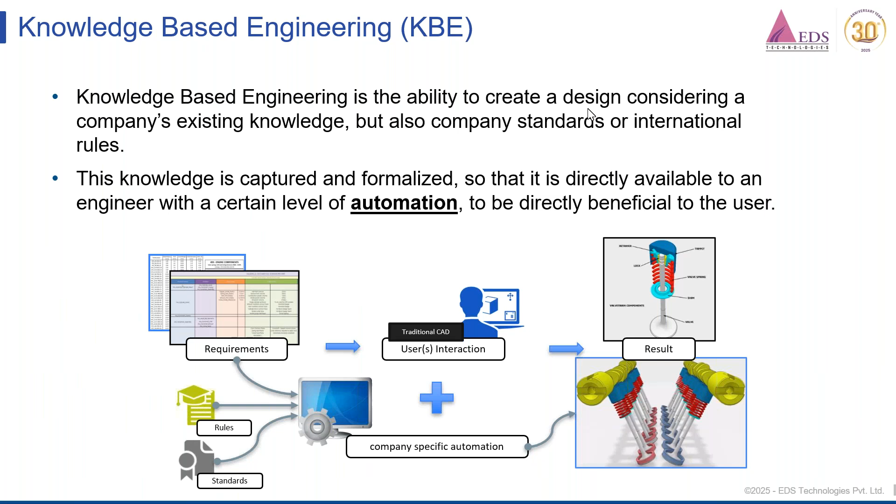Knowledge-based engineering enables quick function-driven designs, which leads to more time for innovation. It helps us arrive at a solution right the first time, consistently every time, and this helps avoid expensive redesigns. It reduces time on standard tasks, thus leading to an increase in overall productivity.

The CATIA Knowledge apps help users automate product definition, capture corporate engineering knowledge, ensure compliance with corporate standards, guide and assist users through design tasks. They also help us in preventing costly redesigns.

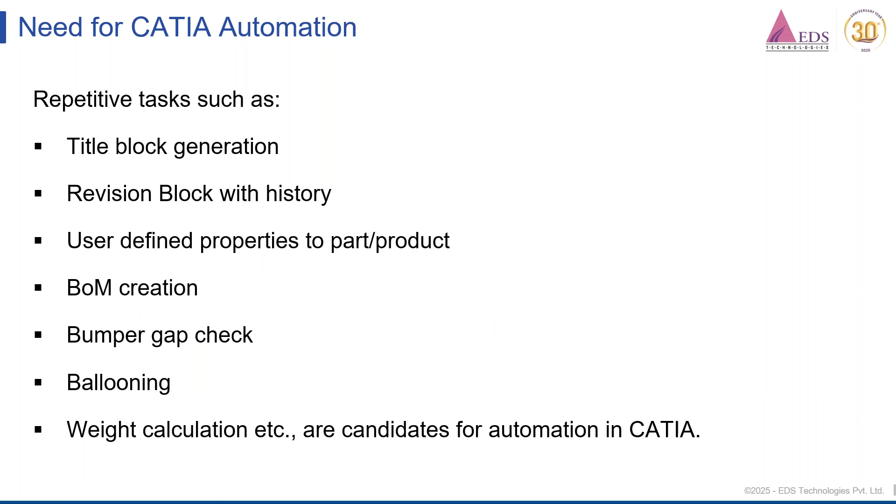These are some of the repetitive tasks that are good candidates for automation: title block generation, revision block with history, user-defined properties to part and product, BOM creation, bumper gap check, ballooning, and weight calculation. Now my colleague Ashish will share some real-world examples that have been delivered in the past.

Thank you, Mr. Srihari. Good evening, everyone. So let us explore some of the delivered use cases. This requirement was from an aerospace company where the customer wanted to create user reference properties for the part and the product, and later the same properties were to be mapped to the title block.

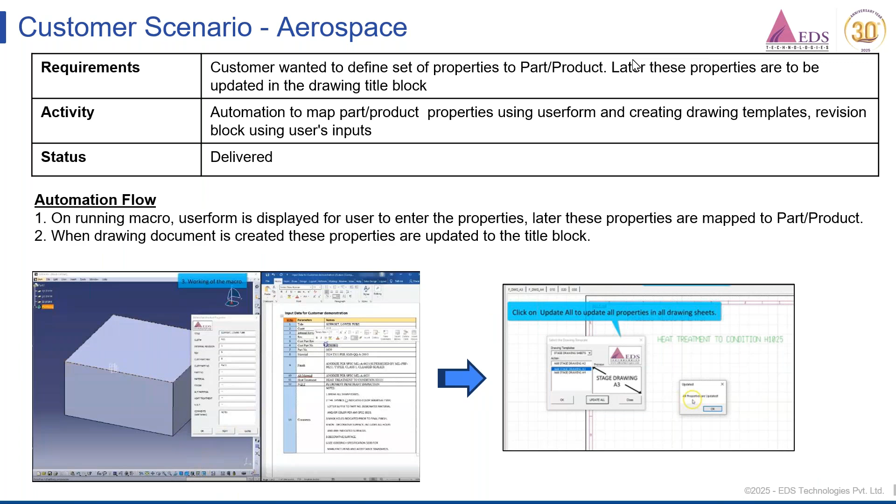So let's see the demo of the requirement. Let's open a part. When you go to properties, you can see the standard properties available.

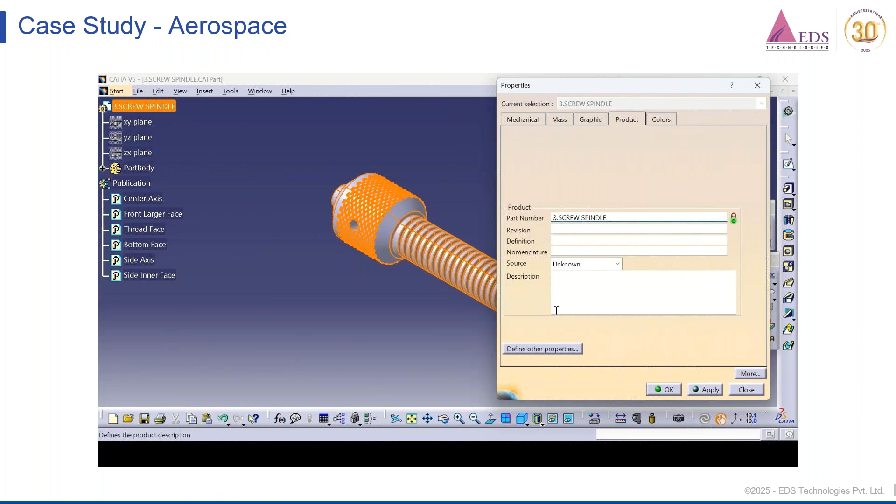Now let's run a macro. When you run a macro, the user form will be prompted. Enter the details and click OK. Now if you go to properties, you can see that user reference properties have been added to the part.

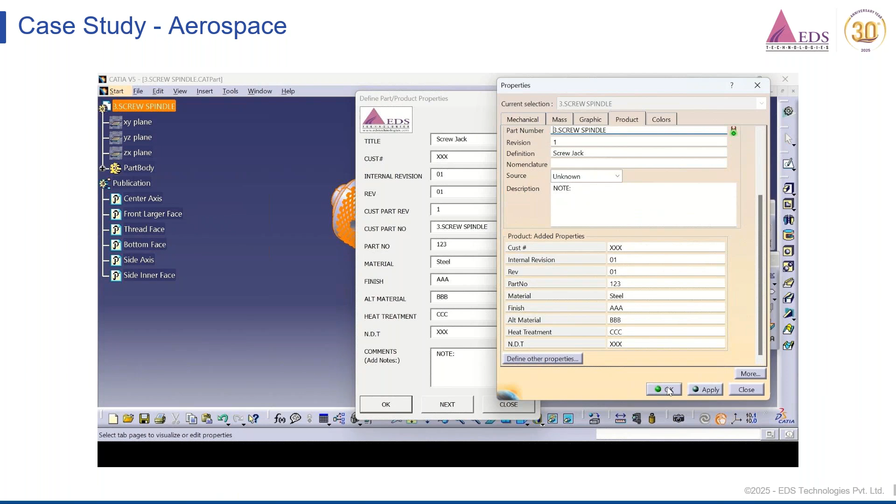Now click on the NEXT button to create the drawing document. Select the sheet size and the standard. Define the drawing document name. Now specify the location to save the drawing file.

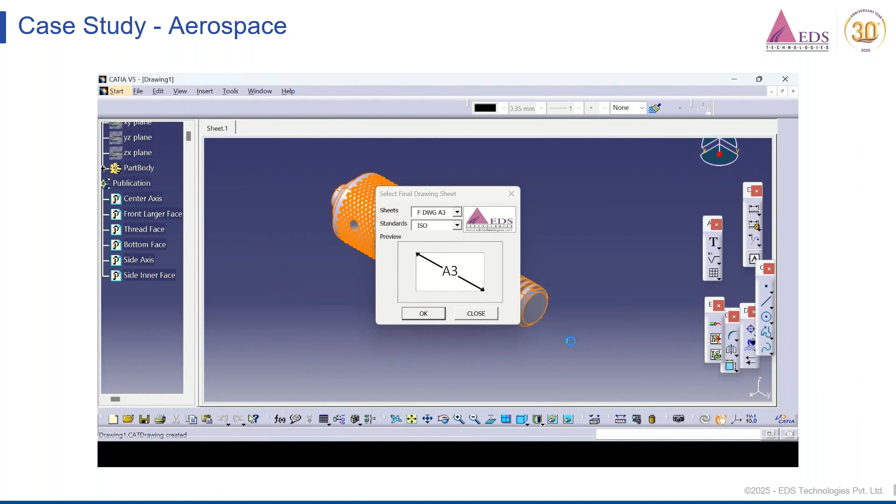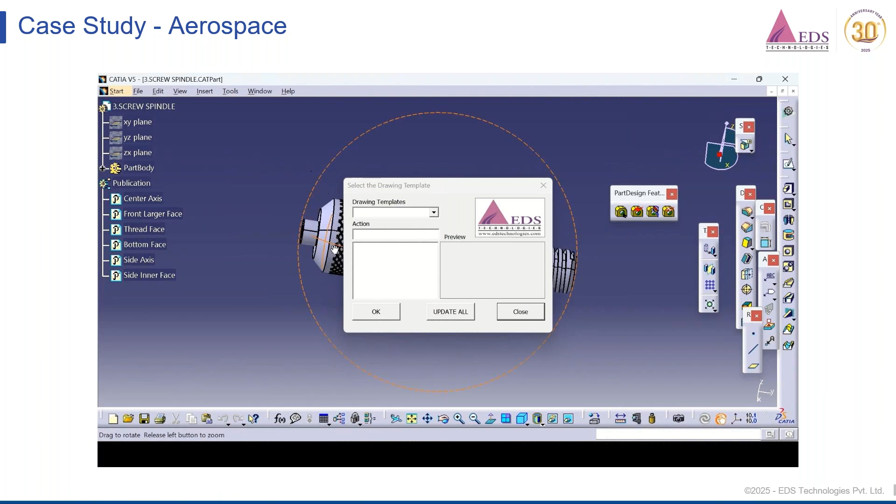Now let's create a view in order to create a link between 2D and 3D. Now let us see how to update the properties with a single click of a button. You can see that the properties of the title block are updated.

Similarly, we can create the revision block. Enter the details. The revision block is created.

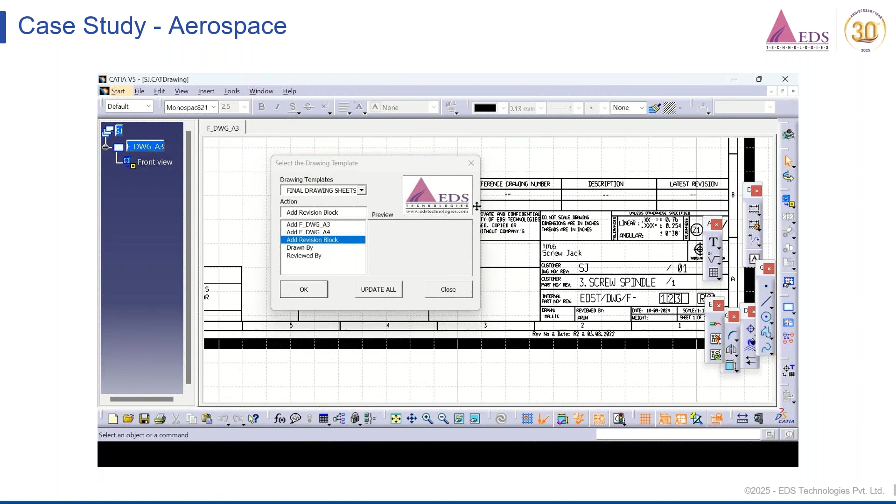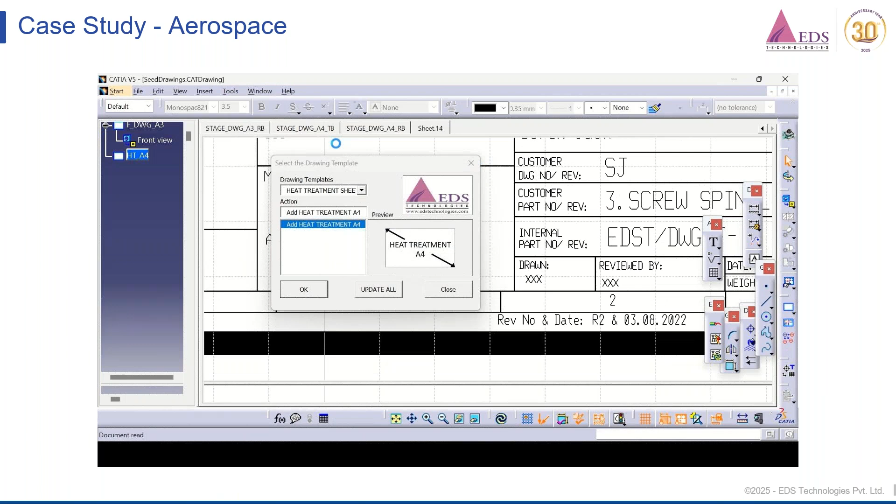We can also update drawn by and reviewed by selecting the respective option. Similarly, we can create multiple sheets and update them with a single click of a button.

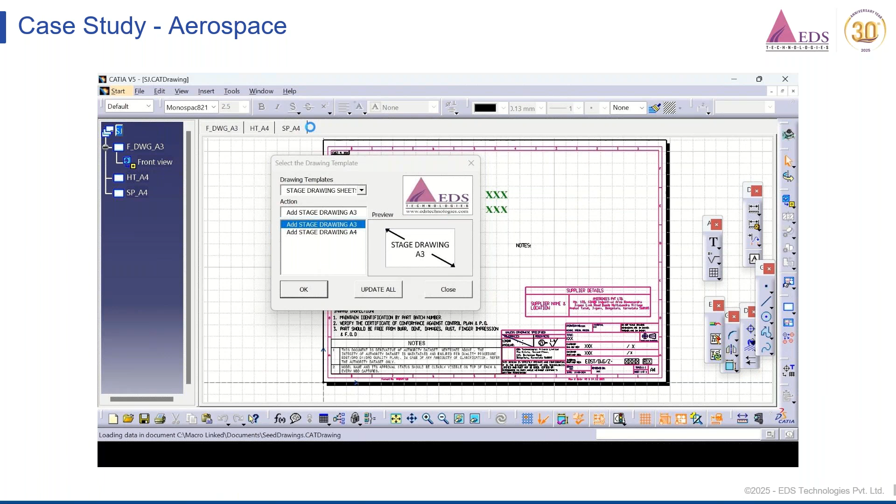Defining 10 properties for a part of a product will take 25 minutes as a traditional method, but using automation, it can be achieved in 2 to 5 minutes.

Similarly, creating the drawing and updating the parameters and properties will take 5 to 10 minutes, and 45 to 50 minutes both. Using automation, it can be achieved in 1 minute.

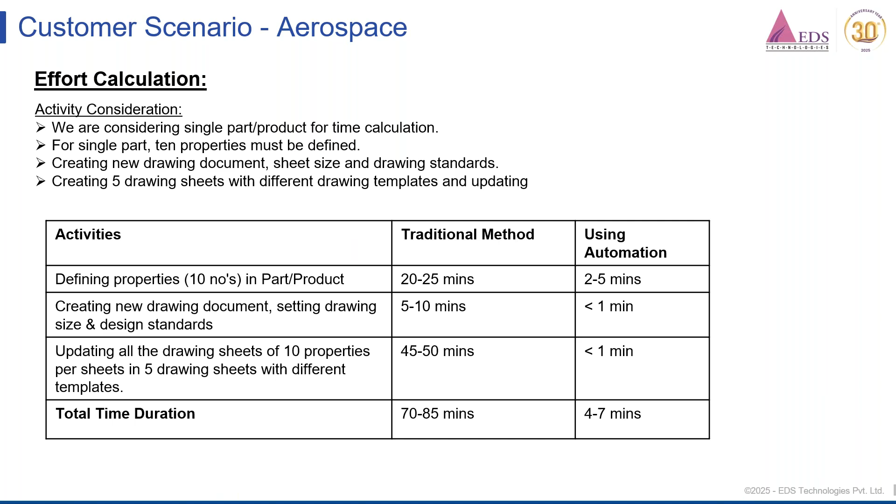So the total duration for the traditional method used to take 70 to 85 minutes, but using automation, it can be achieved in 4 to 7 minutes. The average time saved from this automation is 90%.

Moving to the next requirement, BOM extraction for an automobile industry. Besides the mechanical properties like mass, density, surface area, there are some calculated properties incorporated in this BOM like material type, paint area, paint thickness, and total center of gravity.

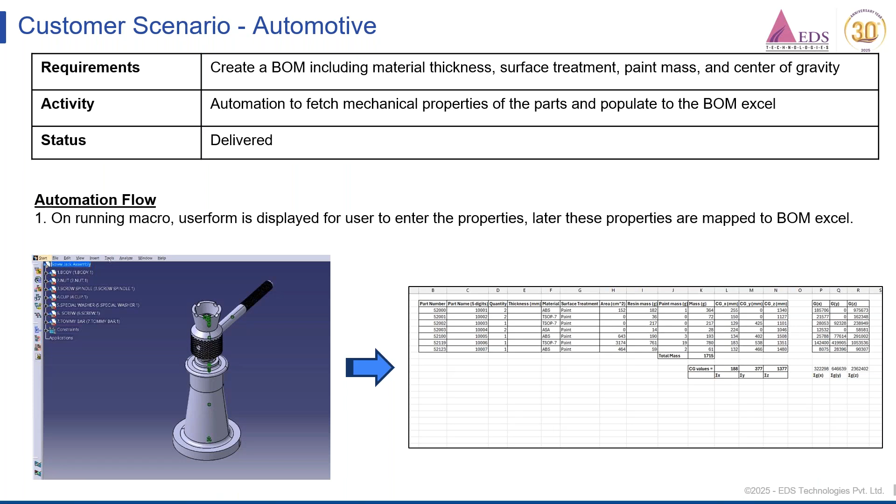This automation was created for a bumper panel assembly, but due to customer proprietary data, we are presenting this demonstration on a different assembly file. Let's have a demo.

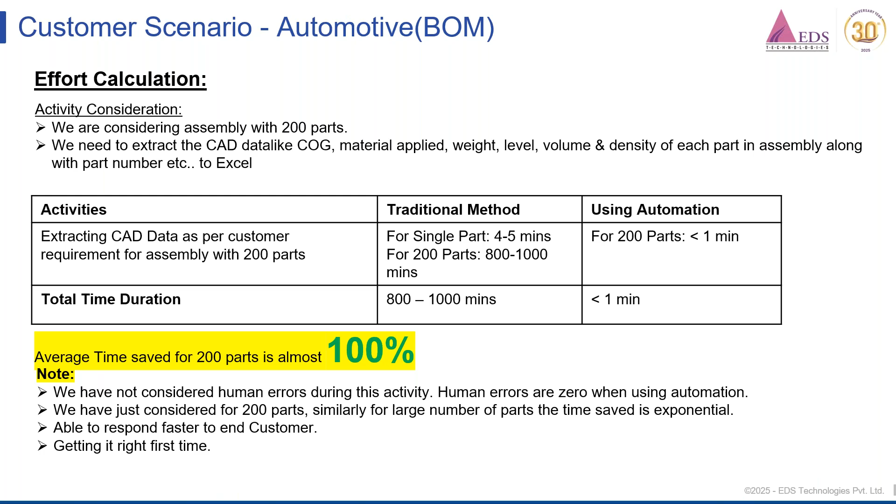So the BOM is extracted. This traditional method, let's take 200 parts, would take 800 to 1000 minutes, but using automation, it can be achieved in 1 minute. So the overall efficiency gain through this automation is 100%.

Moving to the next requirement, creating the drawing table in the drawing document from the Excel data. There will be two tables generated with a different orientation. Let's see a demo.

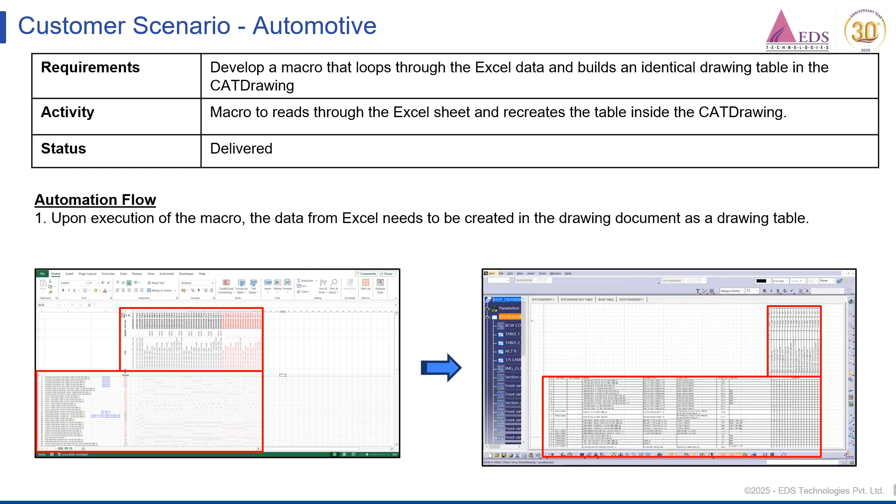When we run a macro, it will ask us to select the Excel file. Enter the path of the Excel. Once you give OK, it travels through the Excel.

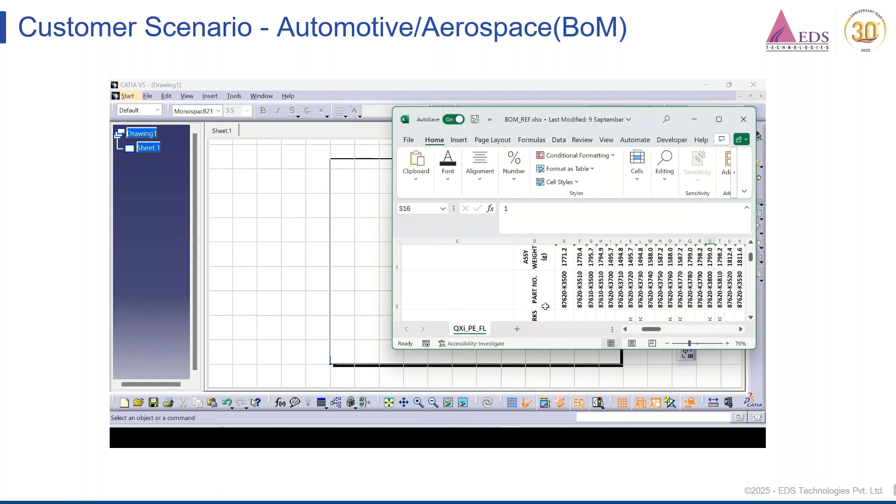This Excel has 56 columns and approximately 4,000 cells that need to be entered manually in the drawing document, maintaining the font orientation as in the Excel. Once the tables are created, they can be aligned by the user.

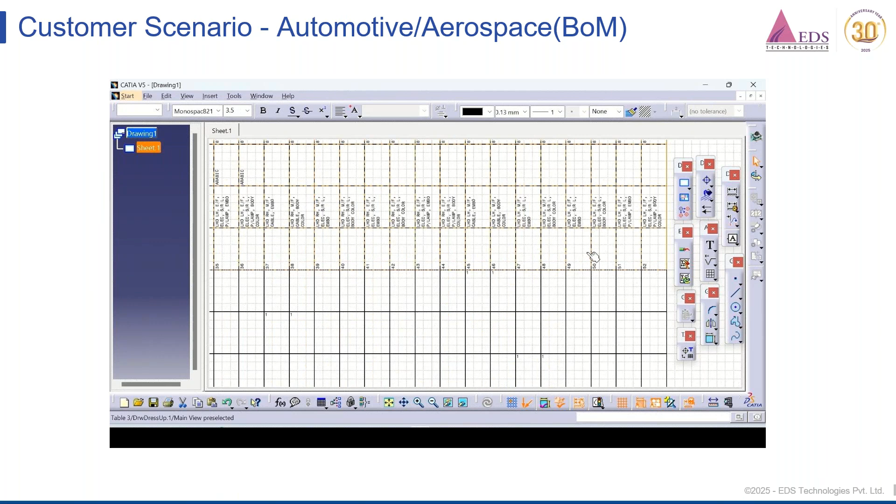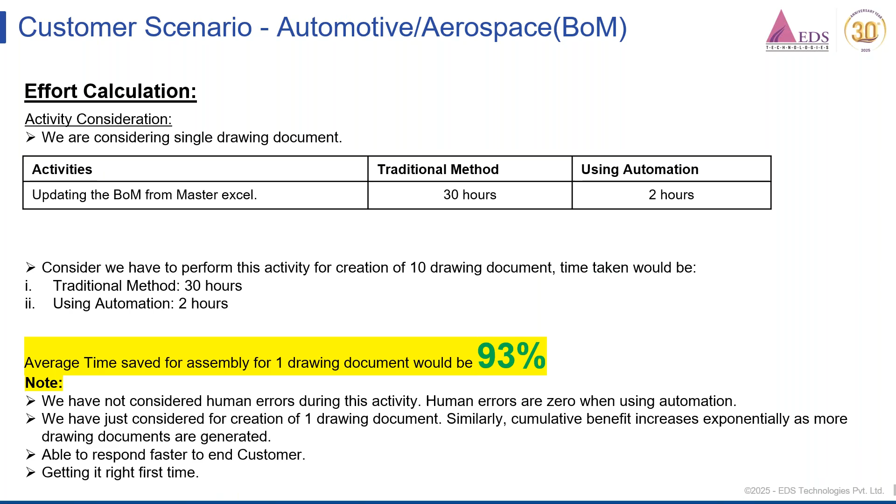This traditional method used to take 30 hours, but using automation, it can be achieved in 2 hours. So the overall efficiency gain through this automation was 93%.

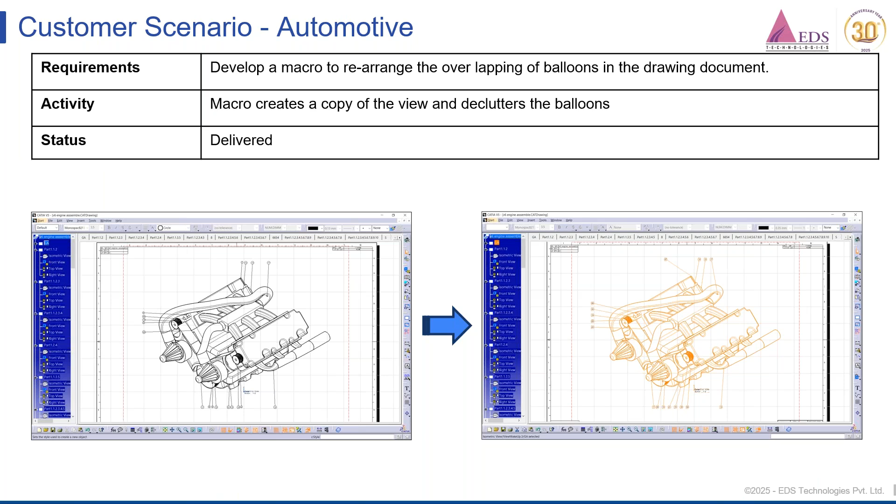Moving to the next requirement, arranging the overlapping balloons. Let's see a demo.

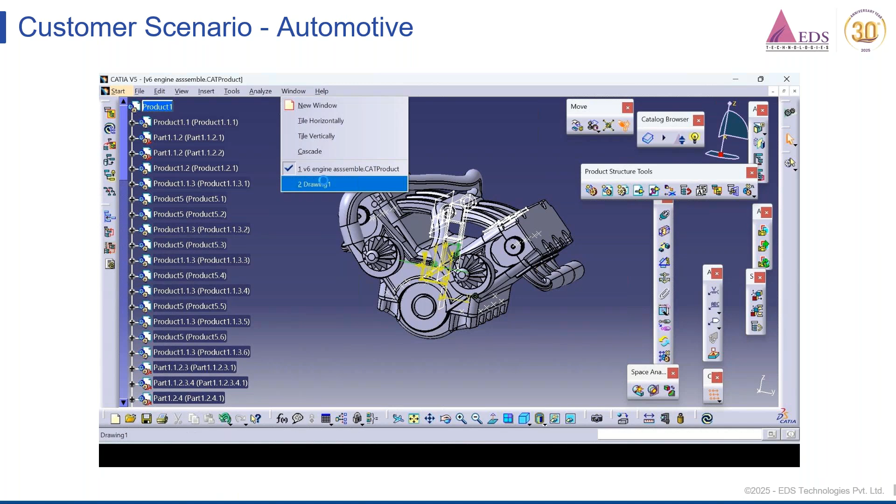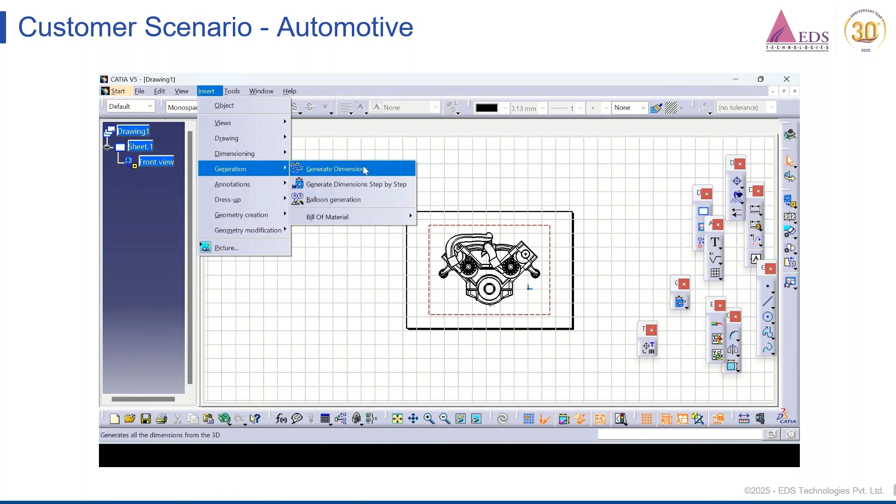You can see the assembly. Let's generate the numbering. Now let's create a drawing document. Now let's generate the balloon. Now let's run a macro.

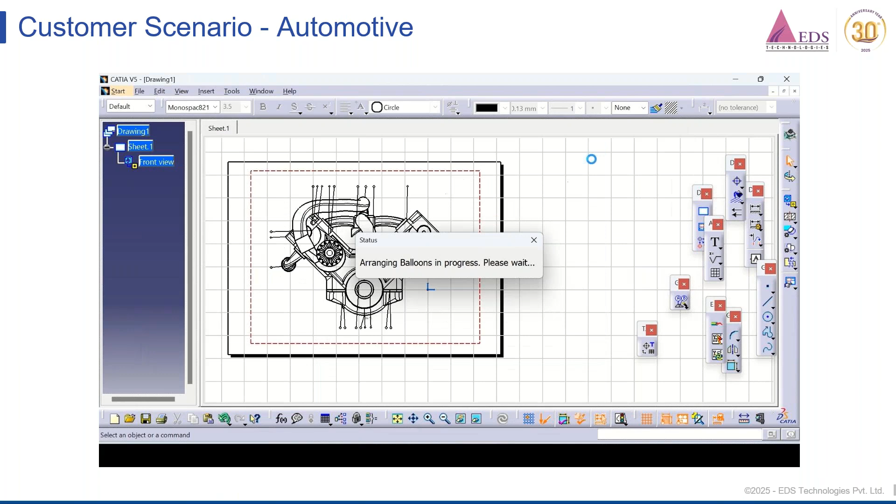The automation creates a copy of the current view and declutters the balloons from the current view to the copied view. The same process can be repeated if decluttering of balloons is required.

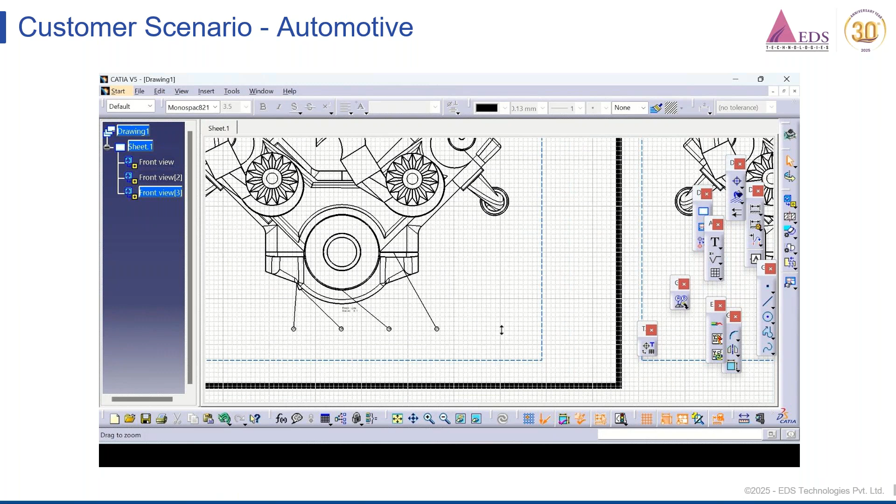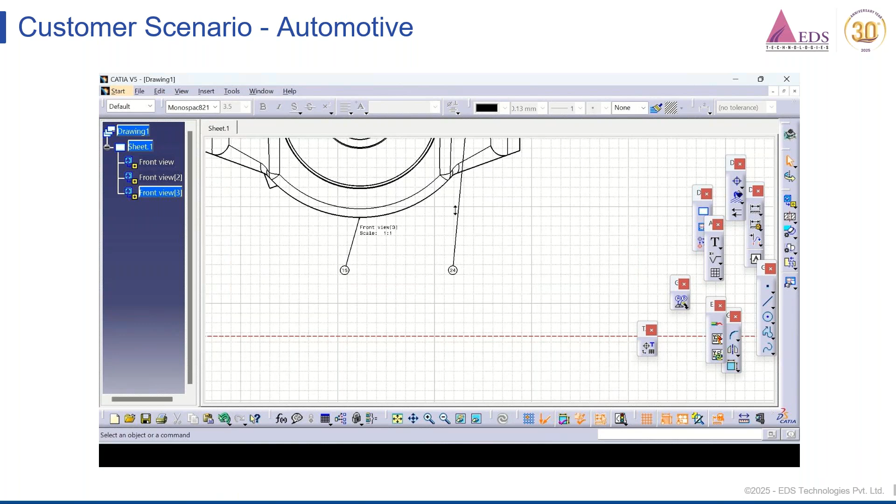This traditional method used to take 5 to 10 minutes, but using automation, it can be achieved in 20 seconds. So the time saved from this automation is 94%.

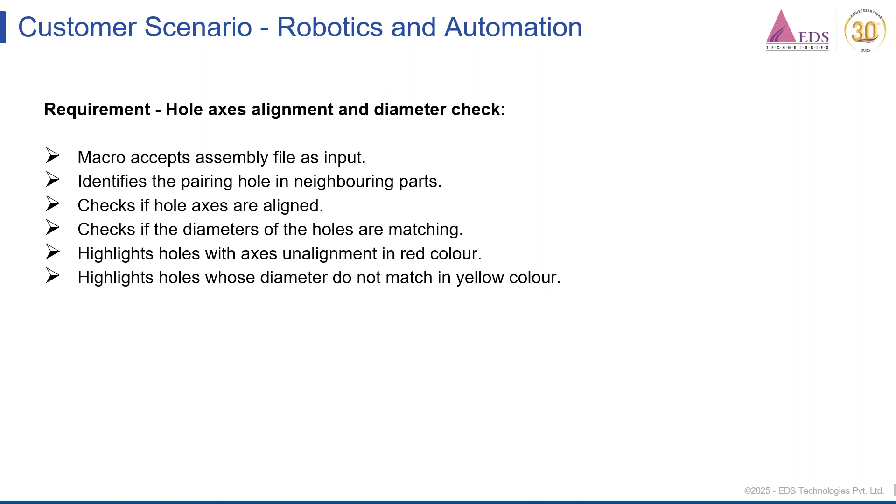Moving to the next requirement, hole axis alignment checking and diameter mismatch. Let's see a demo.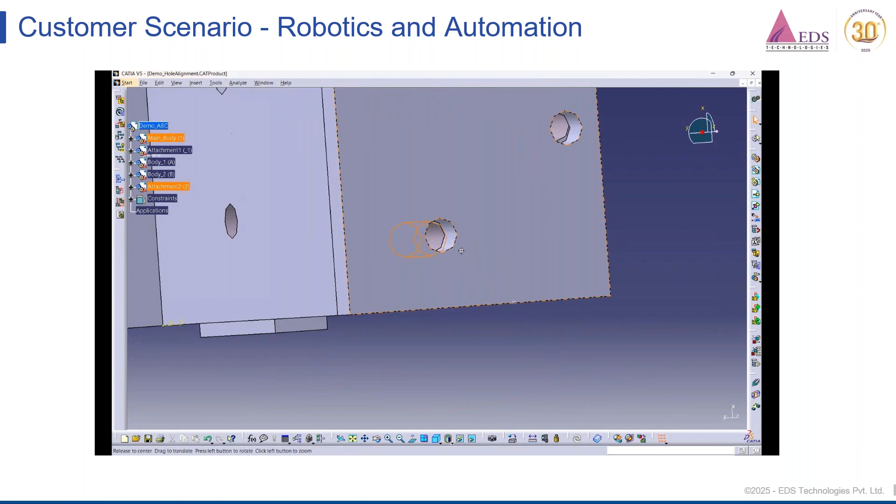You can see an assembly with adjacent multiple holes, which has axis alignment issues and diameter mismatch. Now let's run the macro.

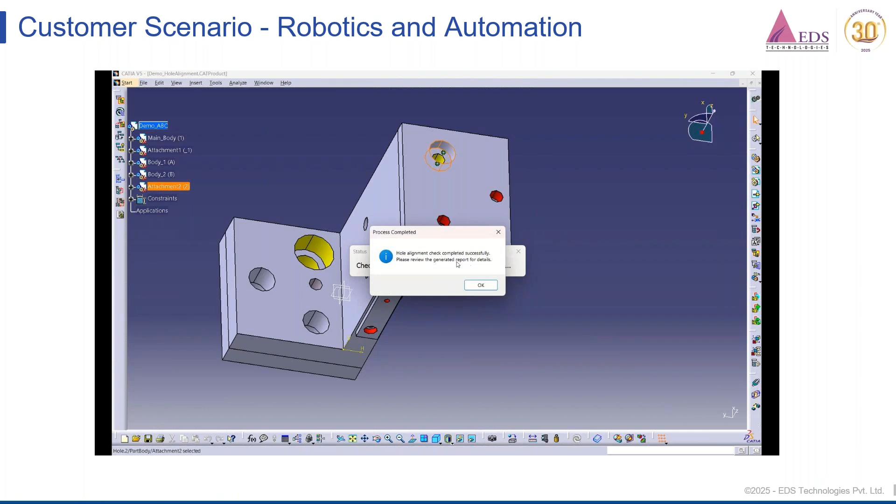You can see the two colors. The red color represents the axis alignment issues and the yellow color represents the diameter mismatch. You also get the result in the form of Excel. This facilitates the detection of quality issues before the product is delivered.

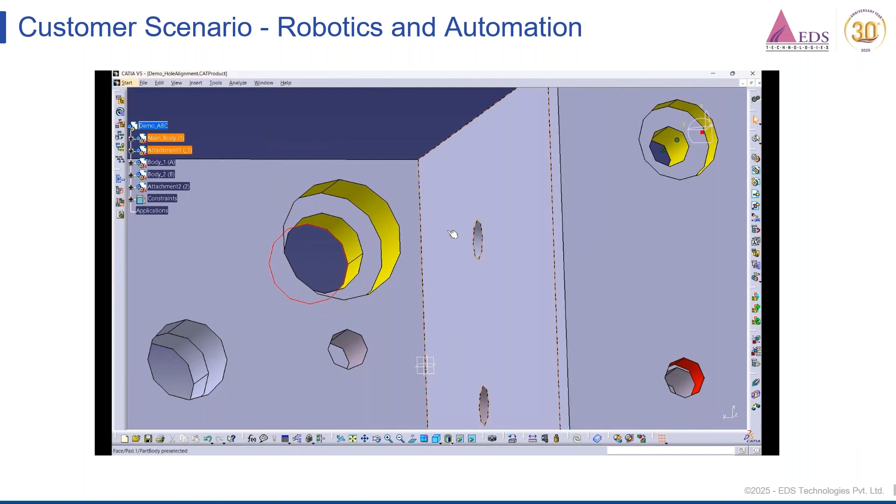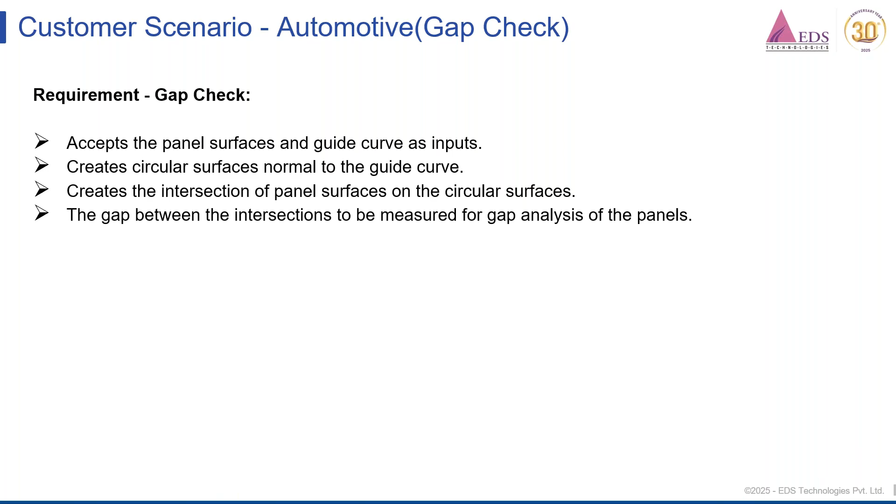Moving to the next requirement, gap check, to check the minimum gap between the two adjacent panels. There are two surfaces and the guide curve.

Along the guide curve, normal planes are created. The intersecting surfaces are projected onto the normal planes, and the gap between the intersecting surfaces is measured and written. Let's see a demo.

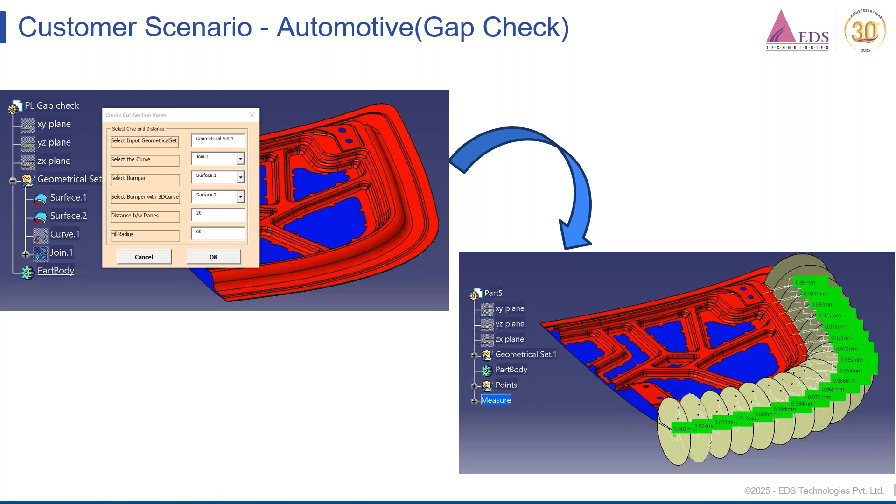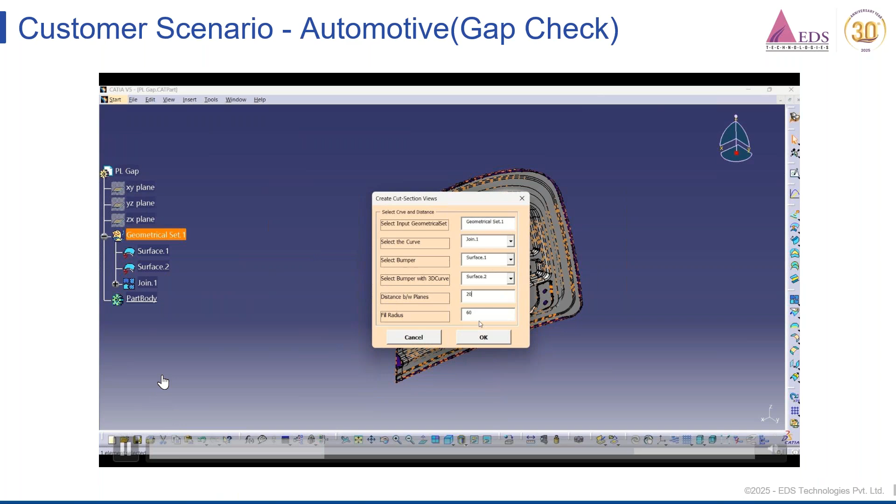Select the inputs. Keep the measure option enabled. We can also decrease the pitch distance to get better consistency and accuracy in the gap check.

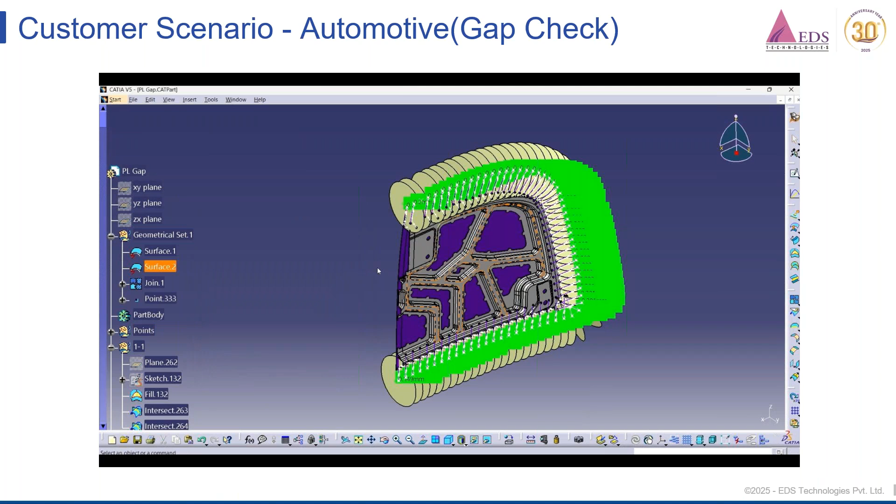This works like a quality check tool, which is performed after the assembly to check the gap consistency.

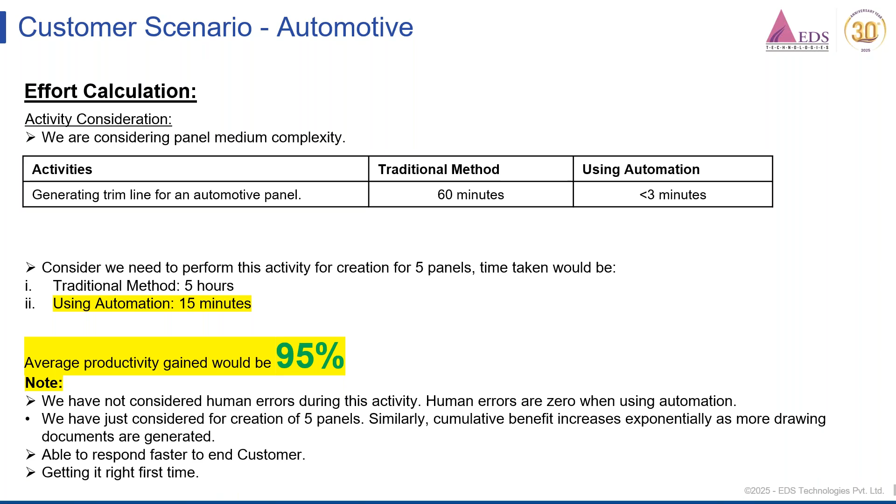This traditional method used to take 60 minutes, but using automation, it can be achieved in less than 3 minutes. So the overall productivity gain through this automation is 95%.

Moving to the next requirement, paint area surface calculation. Let's see a demo.

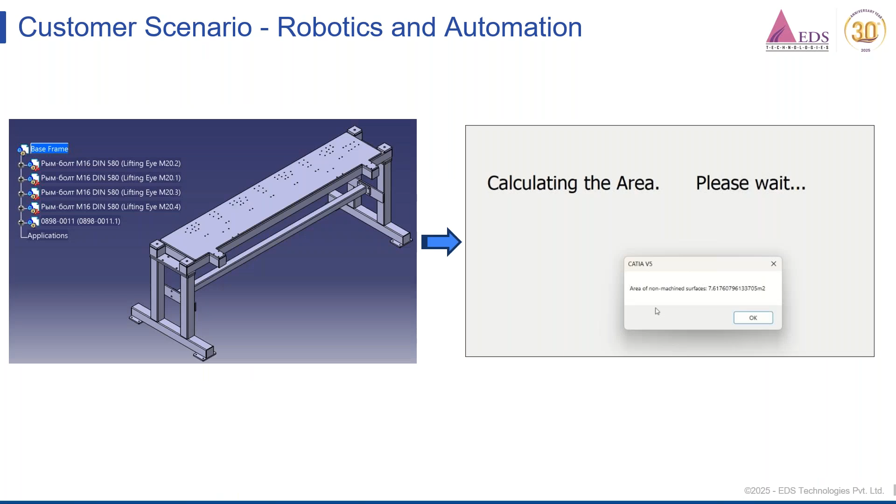You can see an assembly which has multiple machine holes and the overlap surfaces.

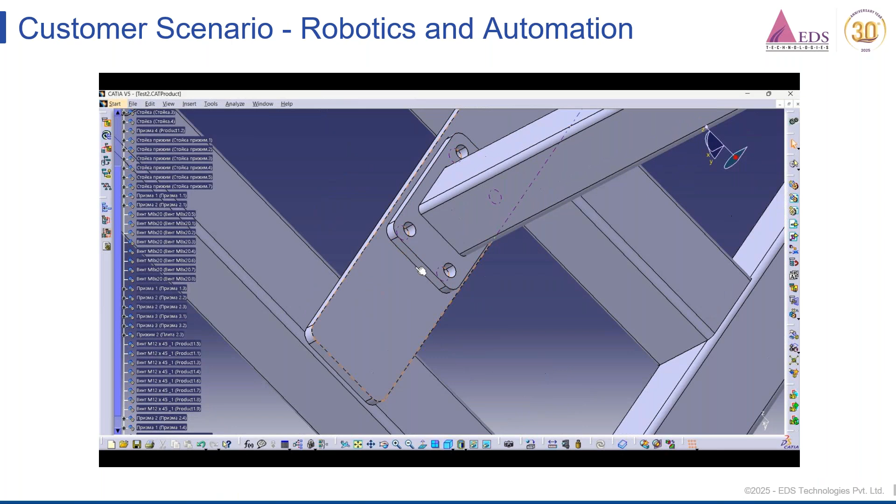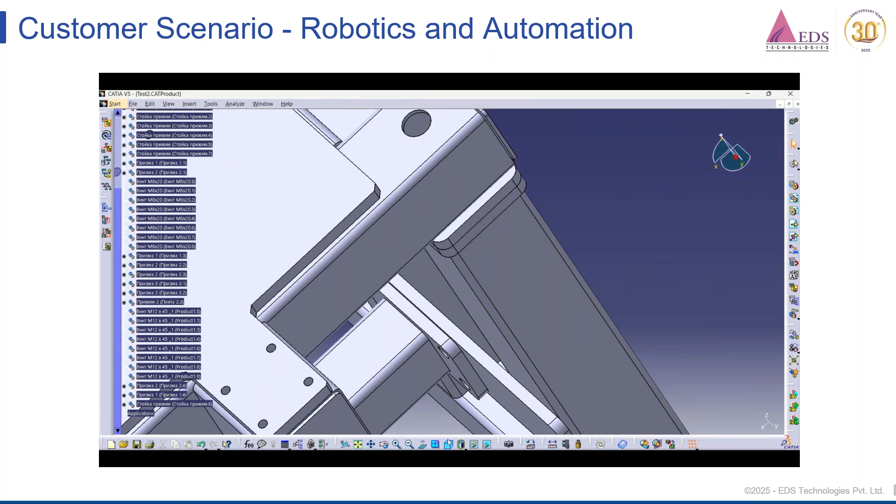So these machine holes and the overlap surfaces are to be excluded from the painting. Go to properties, and you can see the surface area.

Now let's run a macro. So you can see the surface area, which is 10% lesser than the standard value. So the productivity gain in this automation is in terms of cost, which is 10%, unlike previous cases.

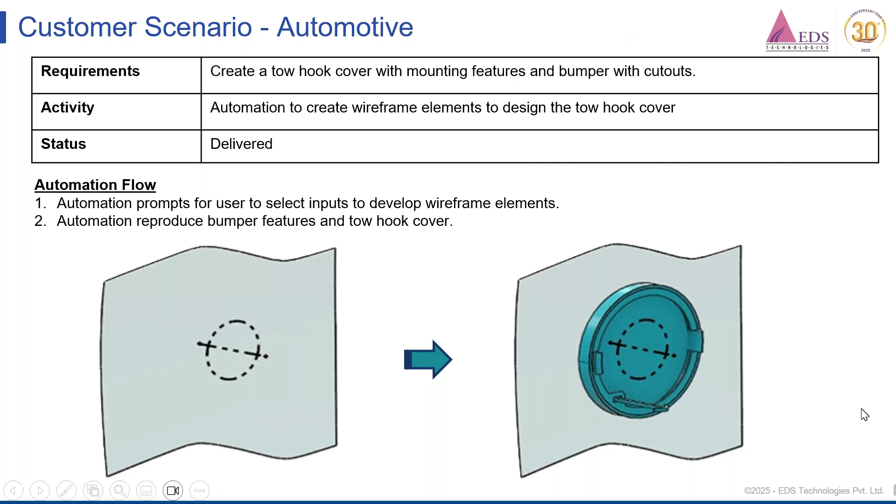Here are the areas where we can see tow hook covers. Let us open the input file. As I mentioned, we only consider two inputs: one is the tow hook cover shape and the surface.

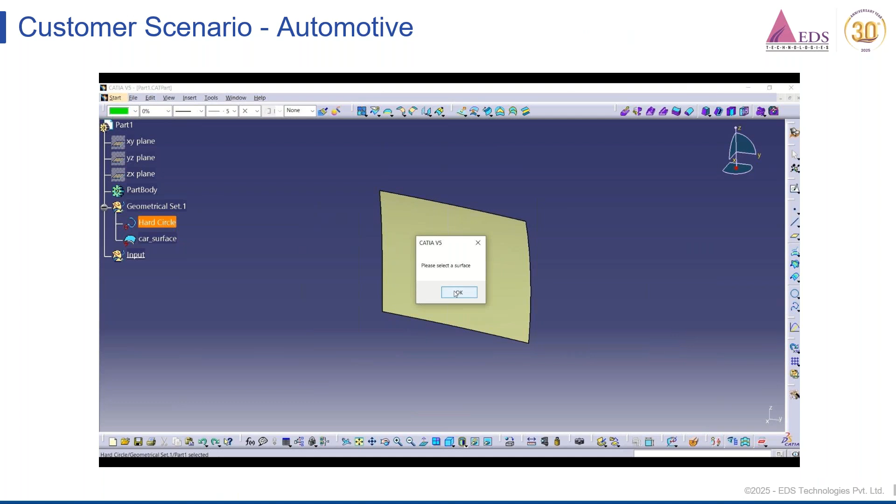So the automation prompts the user to select the input. First we are selecting the circle and the surface. Now we are invoking the automation and selecting the input. In a single click of a button, we are able to get the output.

On top of this automation, we can also configure the design. We can see the slot and arrow features changing across the tow hook cover. With the help of this design table, we can vary the input values as well, and according to that the output will also change.

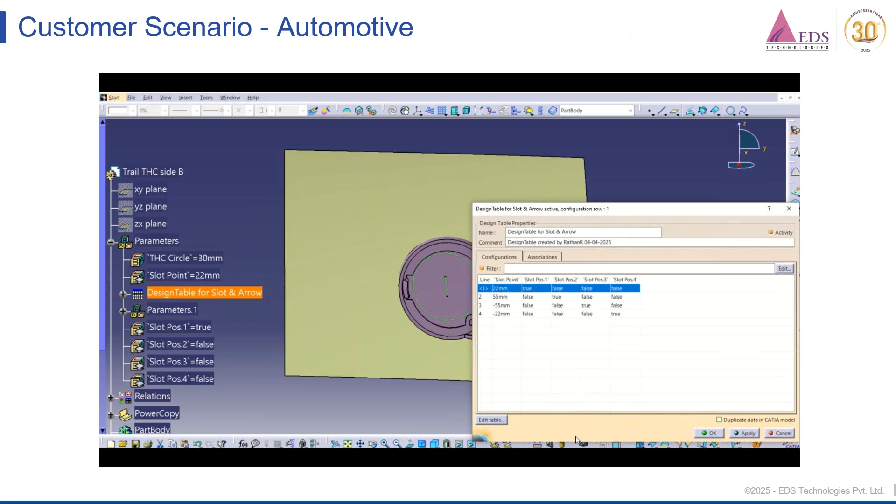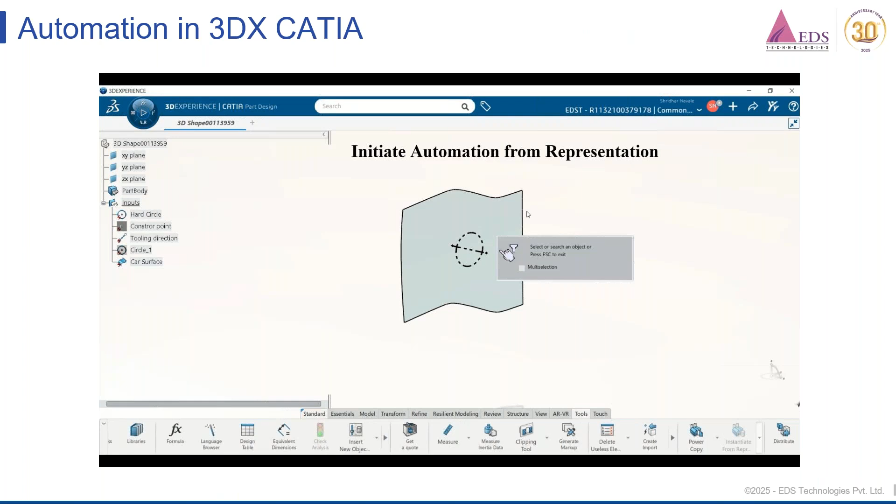The same automation can be done in 3D Experience CATIA as well. Here we consider a set of inputs, and we are invoking the automation. We are carefully selecting the input, and in a single click of a button we get the output.

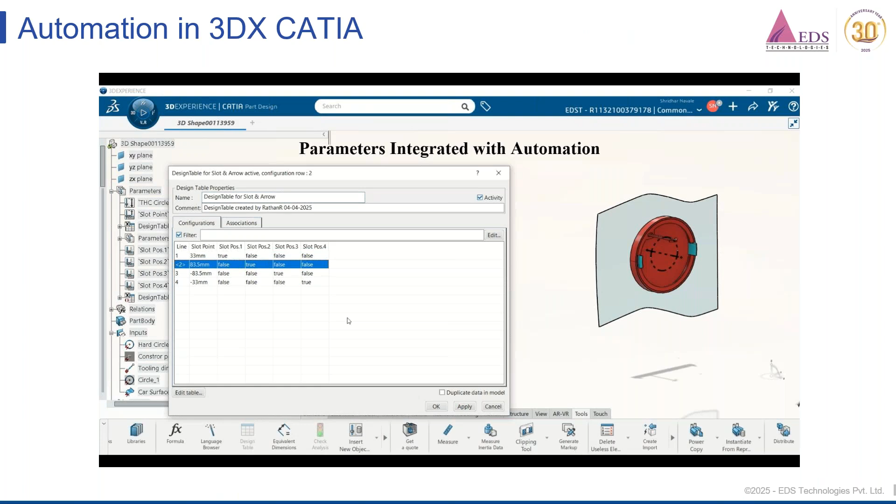Here also we have done some configuration on the output with the help of the design table. By varying the configuration, we can see the slot and arrow features changing in position.

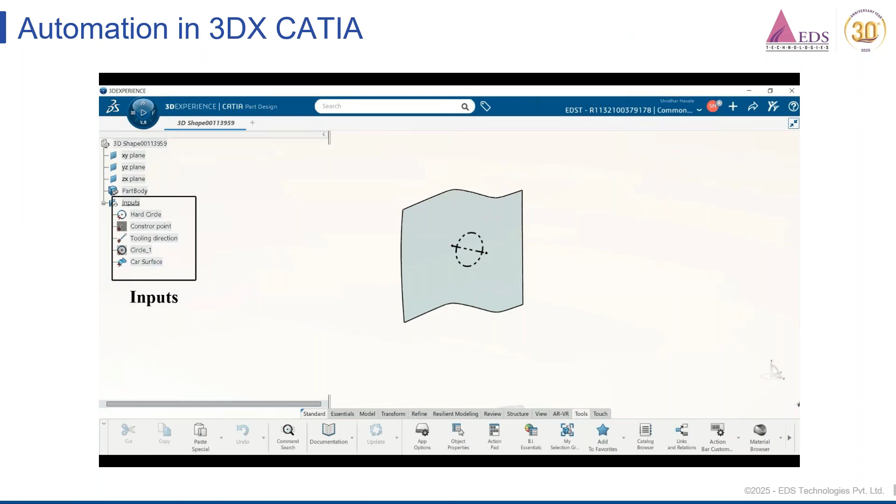Here, the average time taken for this activity to do it manually by the customer would be 1.5 to 2 hours. The same activity can be done using this automation within 4 to 7 minutes. The average productivity gain would be 94%. Here we only consider the creation of one part document; similarly, the time saved for many more components will be an exponential gain.

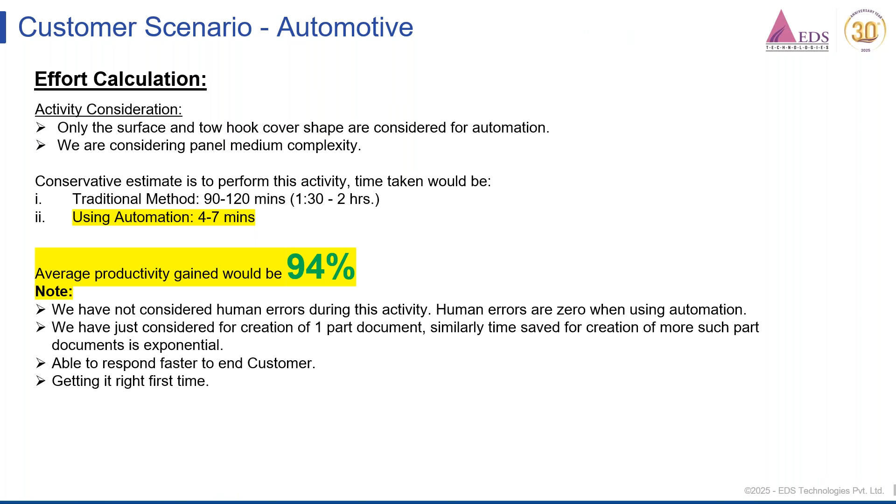So here we have one more customer scenario from an automotive customer, and the customer requirement is to create the milliwave radar cover with the mounting features. Here also we consider the bumper surface as an input, and these kinds of components can be seen in premium models of cars and trucks.

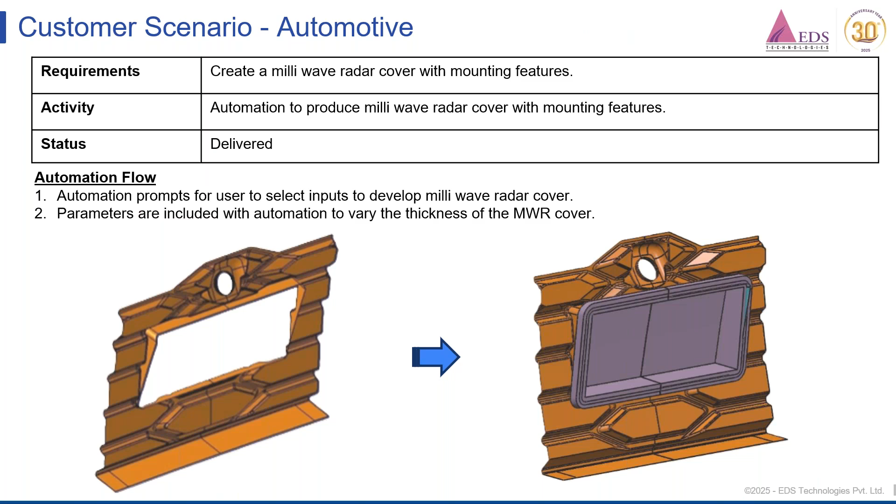Let us see a quick demo. Here MWR covers are usually mounted on the car surface in the front fascia and the rear fascia. Here is how it schematically looks like.

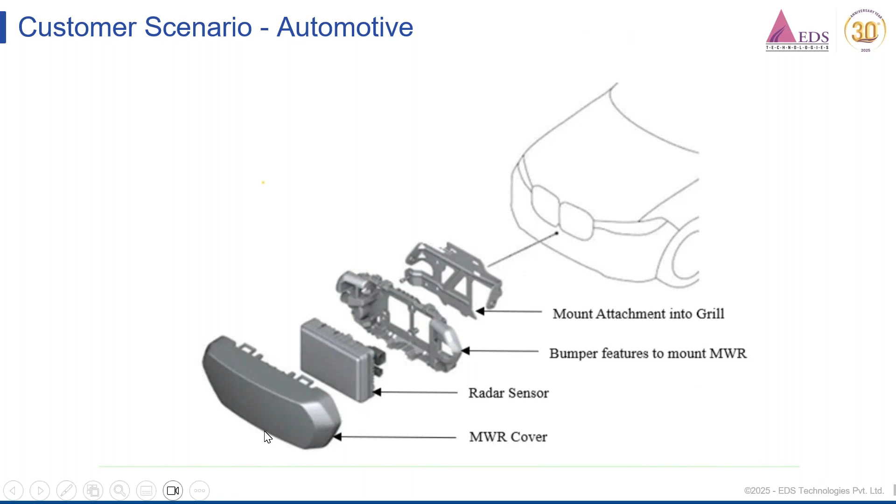So here we are selecting the input file and initiating the automation. With a single click of a button, we can see the results.

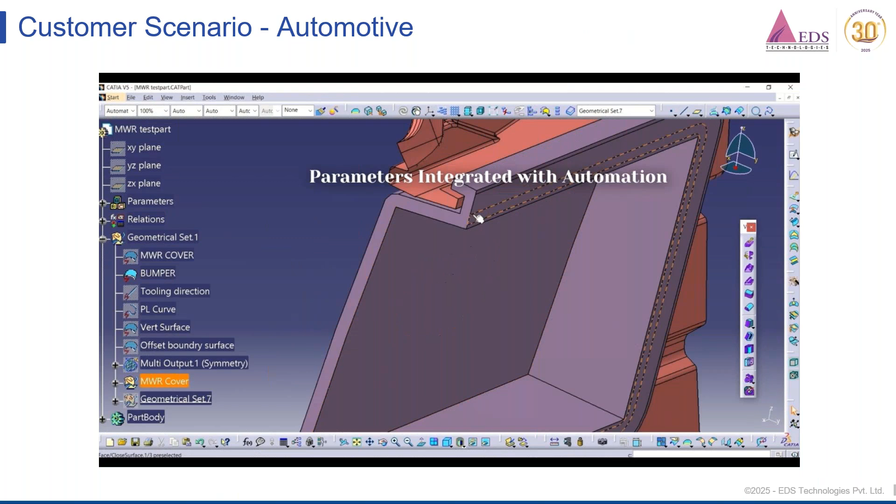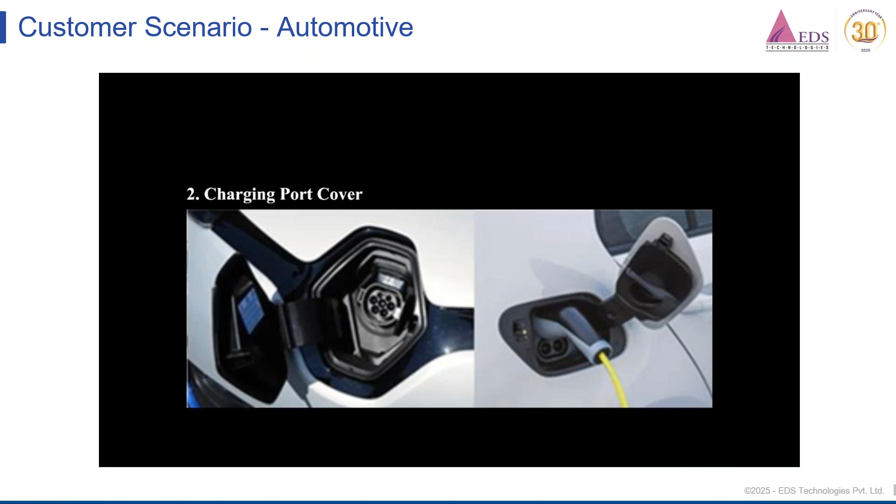We have also done some parameterization on top of this in order to vary the thickness of the MWR cover. You can see the changes we are able to achieve. The same automation can be implemented in various areas such as fuel tank cover, charge port cover, and sunroof cover.

So the same automation can be achieved in 3DEXPERIENCE CATIA as well. Here also we consider the set of inputs and initiate the automation. With a single click of a button, we select the input and we can get the desired output here.

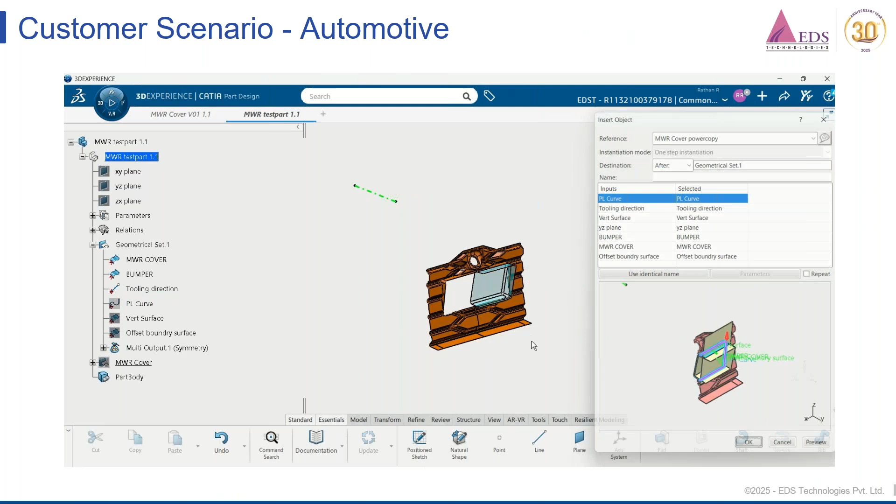The average time taken for this activity to do manually by the customer would be 1.5 to 2 hours. The same activity can be done using this automation in less than 4 to 7 minutes. The average productivity gain would be 94%, which is very significant. And here we are just considering creating one part document; for creation of more milliwave radar covers, the time saved would be even more exponential.

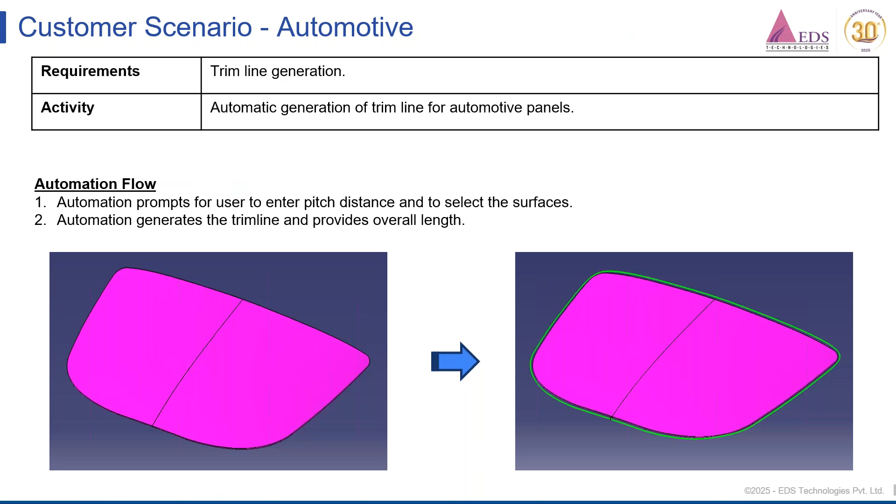We have one more customer scenario from an automotive customer. The requirement is to create the trimline generation for automotive panels. Here we consider the panels as an input, and the output we get is a generated line. Let us see a quick demo of how the automation works.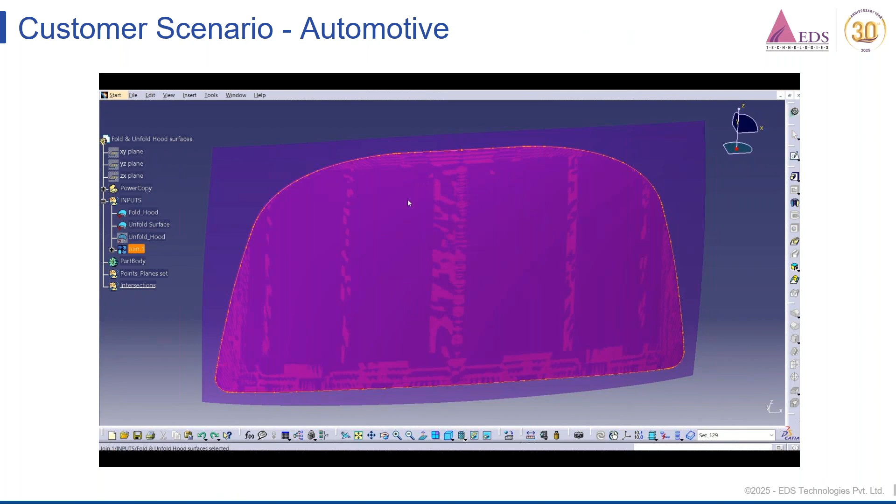The automation prompts the user to select the curve, and automation gives the overall length. With that length, we can decide the number of pitch lengths required based on the requirement, and it prompts the user to select the surface. With the execution of this macro, the end results can be seen in the form of a trim line, represented in green color.

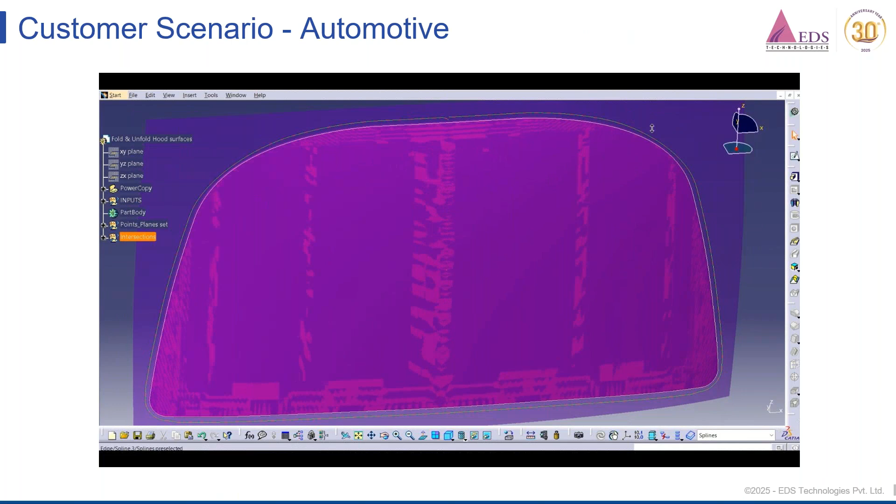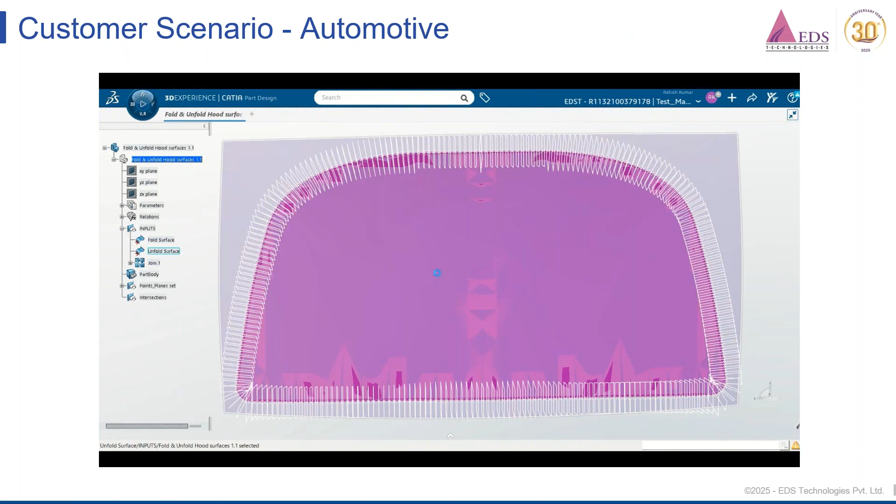The same activity can be replicated in 3DEXPERIENCE CATIA as well. Here it gives the overall length of the curve and allows the user to enter the desired pitch length, and select the surface. With that, we can get the end results with a single click of a button.

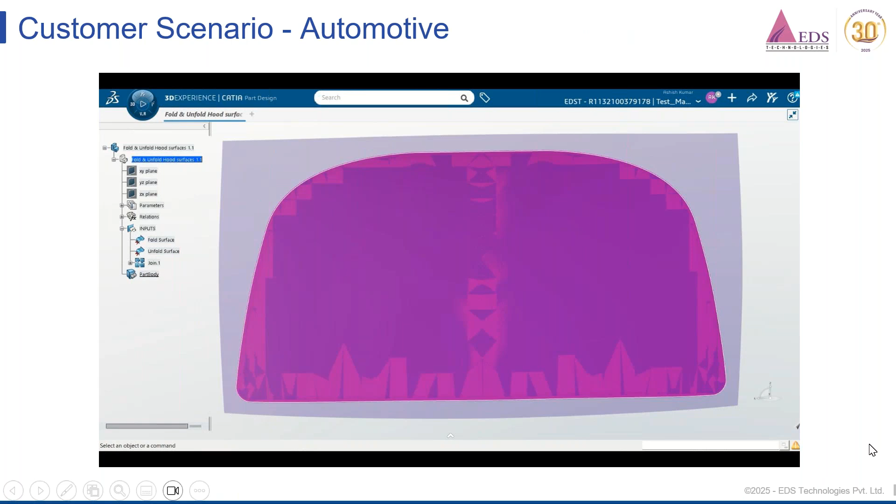Here the productivity gain will be even higher for pitch distances as low as 2mm. The average time taken for this activity to do manually by the customer would take 60 minutes. The same activity can be done using this automation in less than 10 minutes. The average productivity gain would be 95%. Here we consider only a single panel; for multiple panels, the time saved will be exponential.

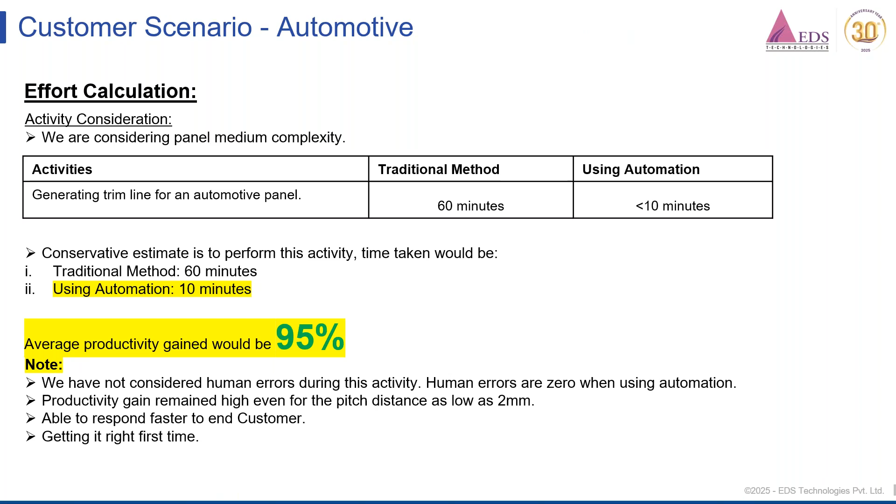The next customer scenario is from an automotive supplier. Here the requirement is part coloring of the component within an assembly to distinguish between them for a post analysis process. Here we consider the leaf spring. Let's see how the automation works through a quick demo.

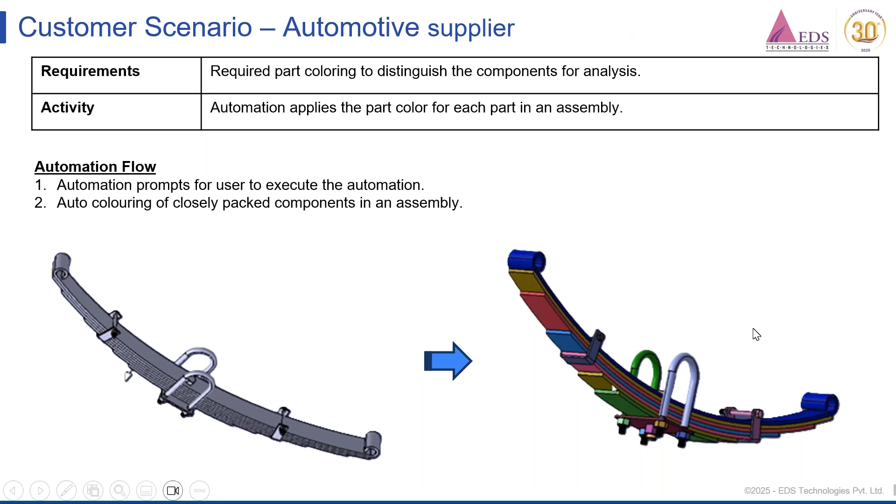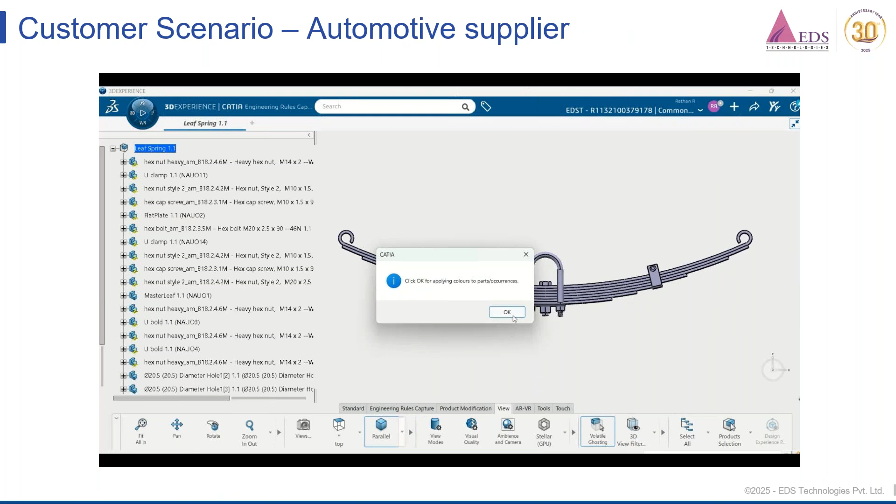These requirements came exclusively for 3DEXPERIENCE CATIA. Here we're invoking the automation, and with a single click of a button, you can see the various different colors assigned for each part and component in an assembly.

The actual customer part is a clutch plate with 100 shim plates of 0.5 thickness. Since it's proprietary data, we have replaced it with leaf springs here.

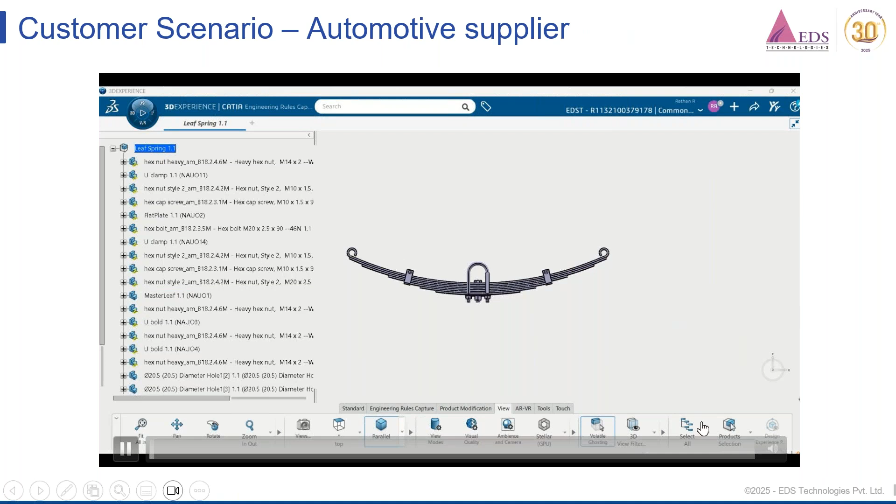The traditional method would take 40 to 60 minutes by the customer, and the same activity can be done through this automation in between 2 to 3 minutes. The average productivity gain would be 94%. Here we just consider 100 parts in an assembly; for larger assemblies, the time saved will be even more exponential.

Now my colleague Srihari will take over next.

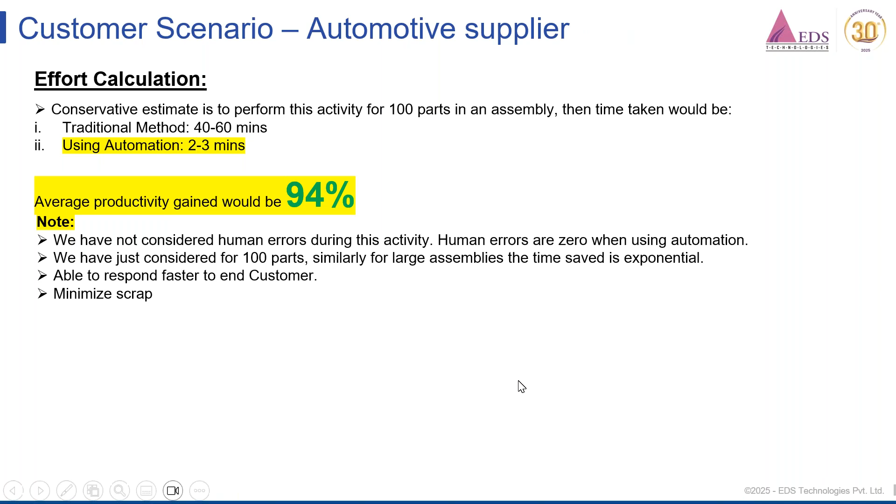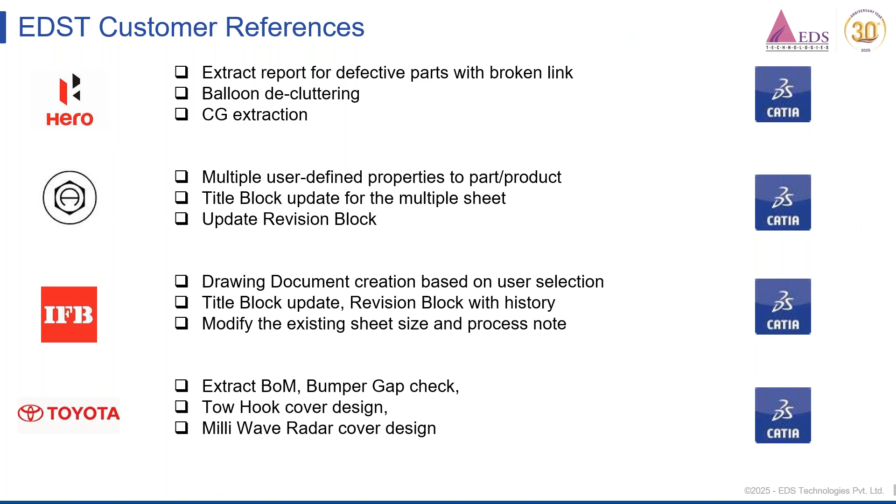Thank you, Ashish and Ratan, for the wonderful presentation. These are some of the customer references and past deliveries we have provided in order to improve productivity, reduce human error, and these are the typical benefits of CATIA macros.